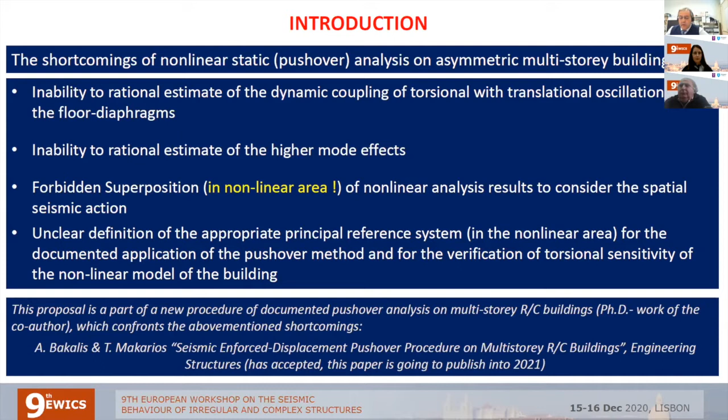Third, forbidden superposition in the nonlinear area to consider the spatial seismic action. Unclear definition of an appropriate principal reference system in the nonlinear area for the documented application of the pushover procedures. And inability to verify the torsional sensitivity of the nonlinear model of irregular in-plan buildings.

The basic concept of the proposal is that the capable near-collapse principal system of the building is defined as the appropriate nonlinear principal reference system. Seismic inelastic floor enforced displacements are applied on each floor diaphragm at the location of the vertical ideal principal axis. In this way, the building is driven directly to the near collapse state.

In other words, our methodology is a direct displacement-based procedure, avoiding various superpositions by using suitable floor-enforced displacement at each floor to fully consider the spatial seismic action via 16 pushovers, where the envelope of these 16 pushovers is considered as an estimation of the seismic demand. In other words, the seismic action is taken into account as suitable floor-enforced displacements.

Please change. I have a problem, I have a problem to change. Can't you share my desktop, please? Sorry to interrupt, you have full control of the presentation. If you just put the direction up and down. I can't go back. Okay, go back. I will ask to go back on your presentation. Like this, is it okay? Go back. Go back, please. Okay.

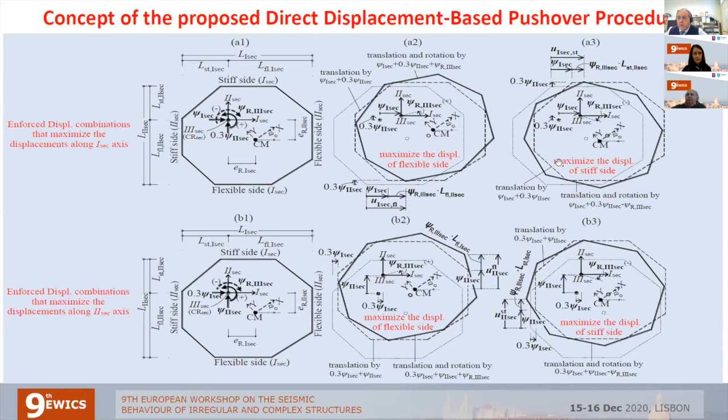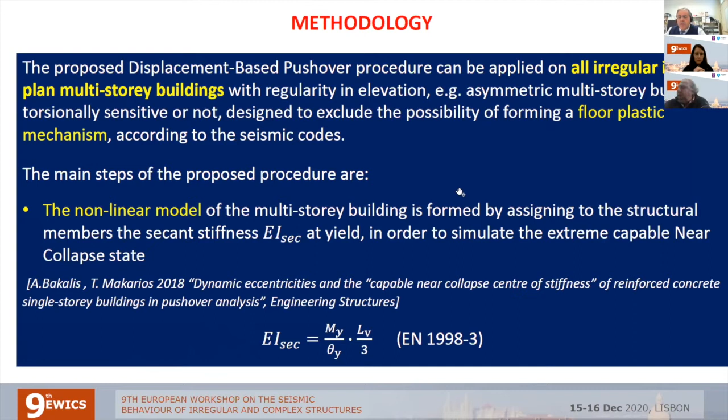Please go. The proposed displacement-based method: the main steps are that the nonlinear model of the multi-story building is formed by assigning to the structural members their secant stiffness at yield, in order to simulate the extreme capable near-collapse state according to Eurocode.

Calculation of the vertical fictitious elastic axis, namely the optimum torsional axis of the above-mentioned multi-story model of the building. Thus, the location of the capable near-collapse center of stiffness of the multi-story building is the point of the diaphragm at 80% of building height from its base, through which the optimum torsional axis of the building passes.

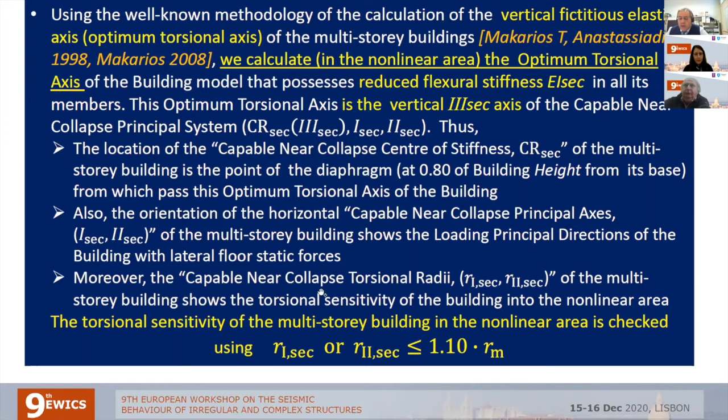Also, the orientation of the horizontal capable near-collapse principal axes 1 and 2 of the multi-story building show the loading principal directions of the building with lateral floor static forces. Moreover, the capable near-collapse torsion radii of the multi-story building show the torsional sensitivity of the building in the nonlinear area using this relation scheme.

In the picture, we can see that knowing the level, we can estimate the inelastic floor angular deformation at near collapse state for frame buildings, wall buildings, and dual buildings, and for each static eccentricity and torsional flexibility or stiff system.

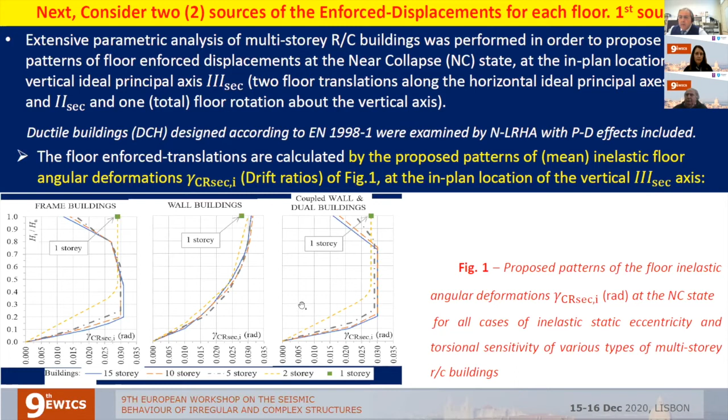By the same way, moreover, from figure 2, we can directly take the floor enforced rotation about an ideal vertical axis, for 3 building types: frame buildings, wall buildings, and dual buildings.

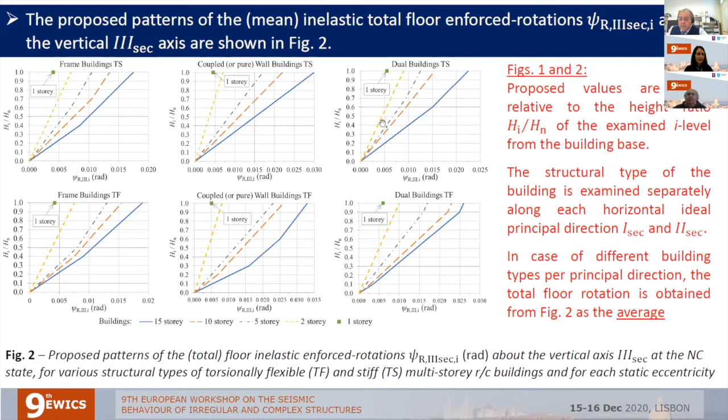According to the second source of the floor enforced displacement, we must carry out 2 sets of temporary pushover analysis, with the floor lateral forces acting on the vertical 3 axes along the horizontal axis 1 and 2.

In the first set, the lateral floor forces follow the uncoupled fundamental translational mode shape. In the second set, 80% of the base shear is distributed as in the first set, and the remaining 20% of the base shear is located as a concentrated lateral force at the top of the building.

Note that we consider 2 signs, positive and negative, of the above mentioned loading vectors, thus 8 temporary pushover analyses are performed. Here, P-delta effects are included, and the target displacement of the top of the 3 axes is calculated by table 1.

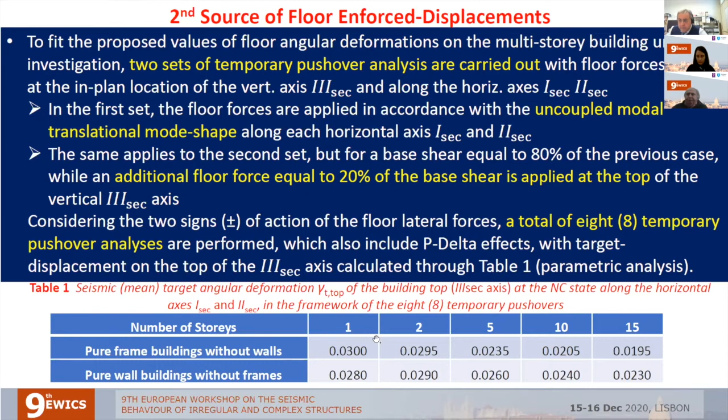The final envelope of the floor angular deformation is taken from the envelope of the 2 sets of temporary pushovers and from the proposed values of figures 1 and 2 by parametric analysis.

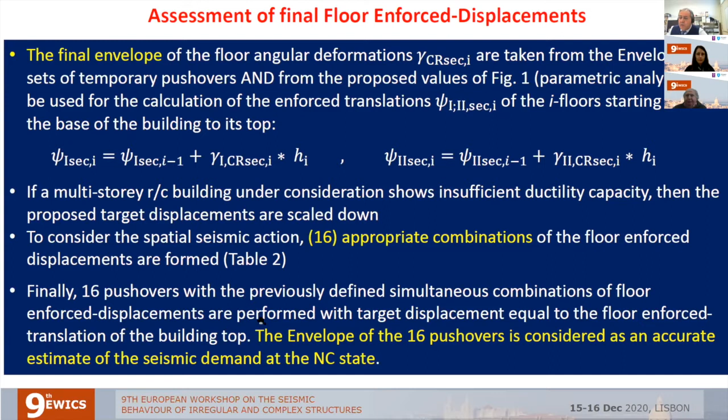To consider the spatial seismic action, 16 appropriate combinations of the floor enforced displacements are formed, where we must take their envelope in the seismic demand at the near collapse state.

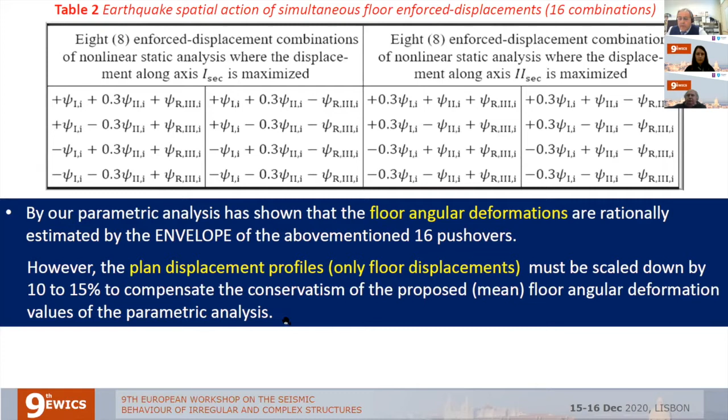Afterwards, all the above mentioned are true with very good accuracy at the near collapse state of the building. For the other seismic performance levels, the present methodology is scaled down according to this guidance.

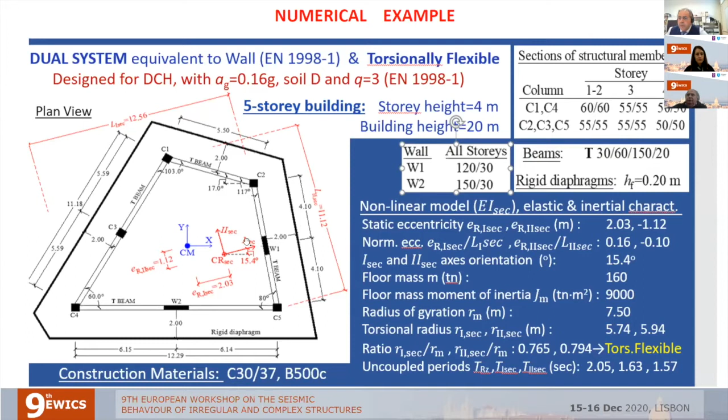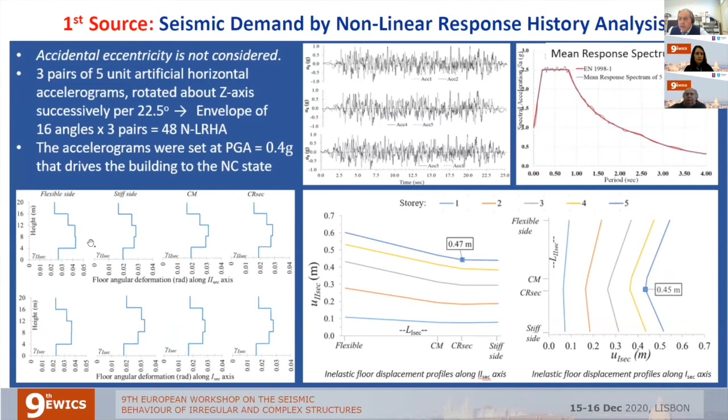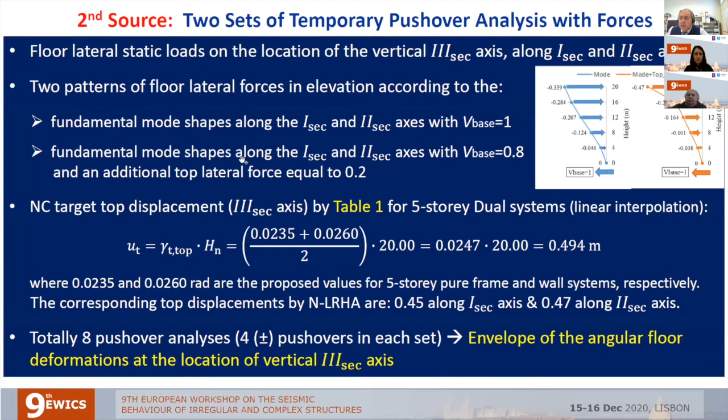By the first source, by nonlinear response history analysis, namely figures 1 and 2, we get the angular deformation in elevation. By the 2 sets of temporary pushover analysis, we get the deformation in elevation, and in the final 16 pushovers with simultaneous combination of enforced displacement.

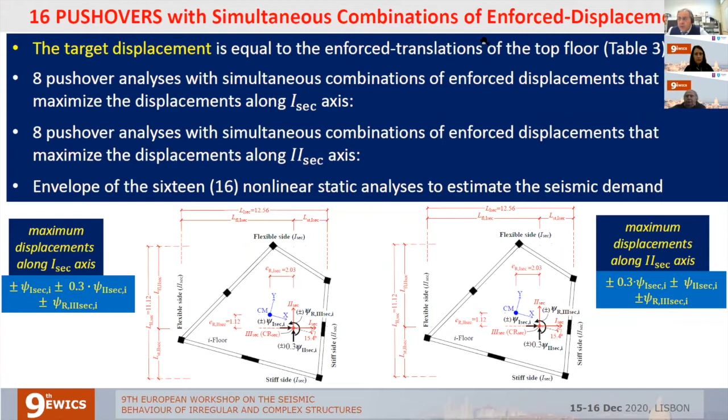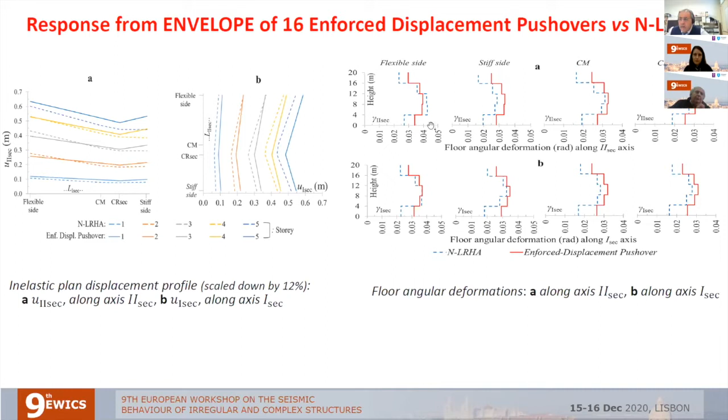Also, the floor angular deformation along axis 2 and along axis 1, giving very good accuracy.

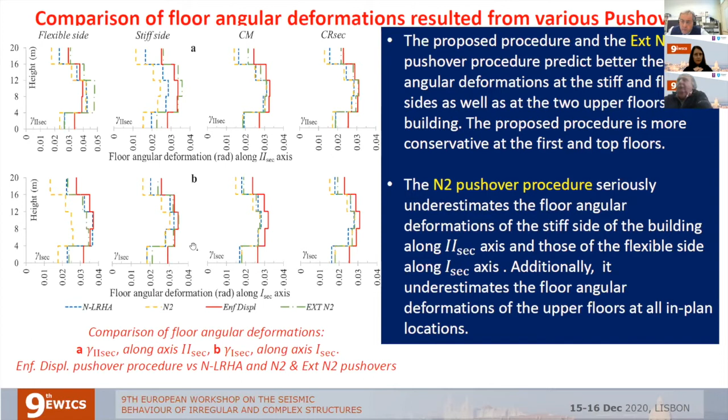Superposition is not used for spatial seismic action in the present methodology. The floor inelastic torsion is estimated with very good accuracy. The new procedure is very simple for all engineers.

The basic key is the definition of the capable near collapse principal system, that is the fictitious elastic system of a multi-story building at the near collapse state.

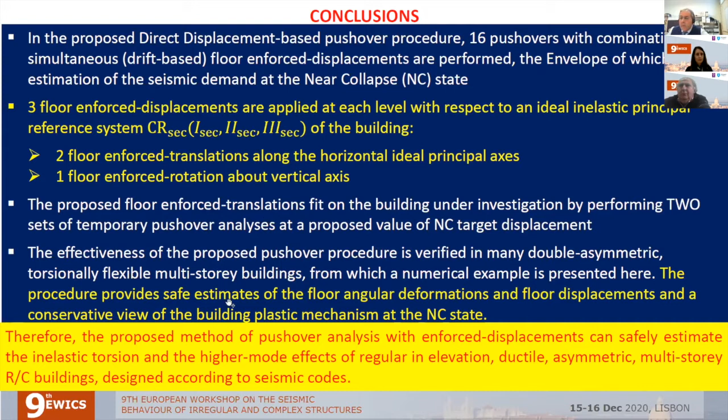I don't see any request. Yes, there's no questions. There are no questions, so you confirm me there are no questions. So I make one question, but a very short one.

Do you plan to check your method also for torsionally stiff systems? Because you checked for torsionally flexible systems, but do you plan to do it also for torsionally stiff and very torsionally stiff systems, such as those having shear walls at the perimeter.

Thank you for your question. Yes, yes, we are checking all types of buildings at torsional flexibility and torsional stiffness. Thanks.

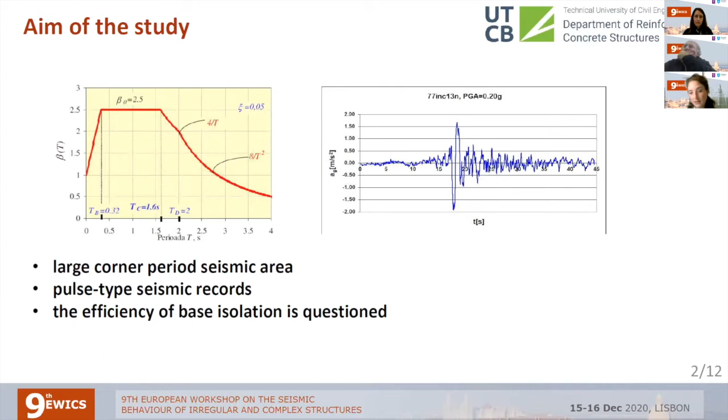This affects, especially in such regions with high corner periods, flexible structures. The idea was to see under these special seismic conditions if base isolation is an appropriate way of dealing with the seismic action, especially for plan and elevation irregular structures. So we chose a hospital building due to the fact that especially for hospital buildings, we expect and want to have immediate occupancy. We want the hospital to remain operational after a strong seismic event.

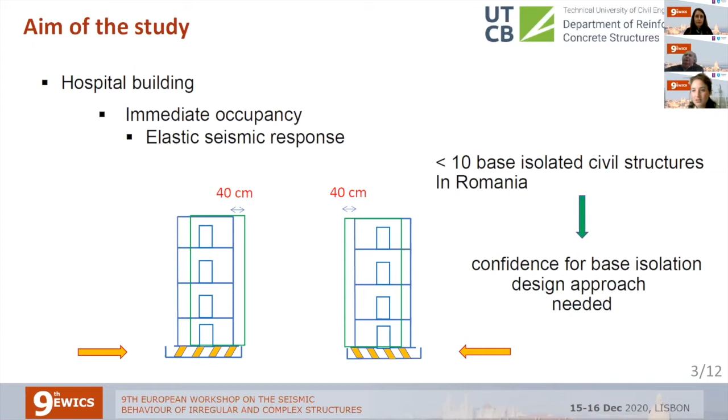Under the seismic conditions of the Bucharest area, we have displacement amounts of 40 centimeters. If we consider that for pushover analysis, we are requested by the seismic codes to reach a displacement capacity of 1.5 times this value, it comes to 60 centimeters, which is a lot. On the other hand, base isolation in Romania is at its start for civil structures. It was used quite largely for bridges, but not for civil structures. Just a few cultural and historical monuments were considered to be retrofitted by this method till now, so the confidence from practical engineers for this method needs a little more help.

We used this model to check the behavior of the structure through ambient vibration measuring. So we have a 5-story frame structure which is plan irregular and elevation irregular just a little bit, let's say at the border of the National Seismic Code. It has a setback from the ground floor to the upper floors, but since this setback is about 30% and affects only one floor, we decided not to take into account elevation irregularity and not to drop the behavior factor according to the seismic code.

This is how the structure was designed, and we checked this assumption by pushover analysis.

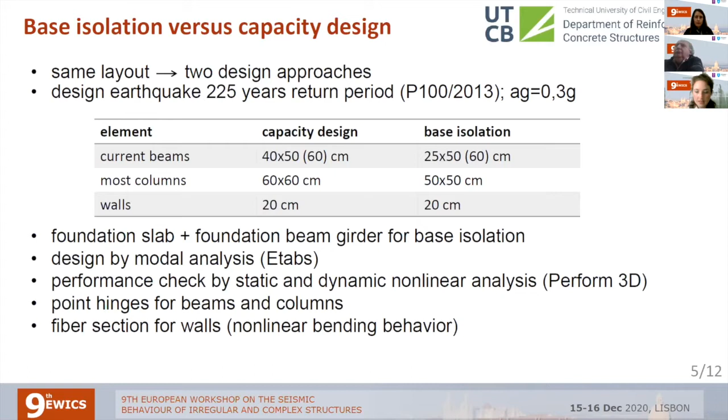Point hinges for beams and columns and fiber sections for walls were taken into account. The isolators considered are, let's say, the state of the art at this point—double curved friction pendulums. The behavior of those pendulums is given by such a diagram.

This diagram gives the relation between force and displacement. They were designed for 64 centimeters displacement capacity, considering the Eurocode 8 considerations, in order to have a bit of comparison with other seismic areas where such pendulums are used. The Romanian National Code doesn't provide this maximum earthquake because we have a lower return period.

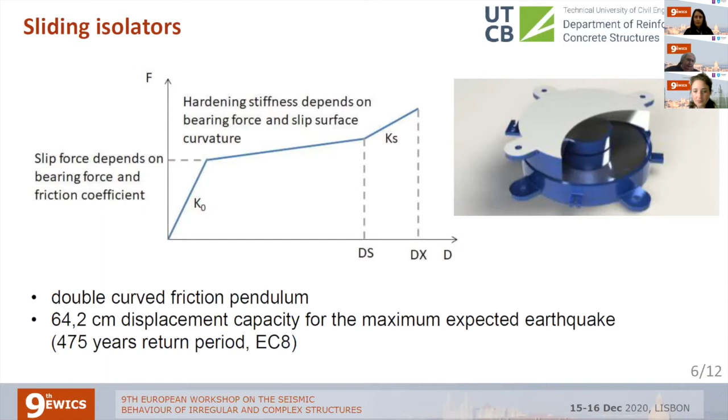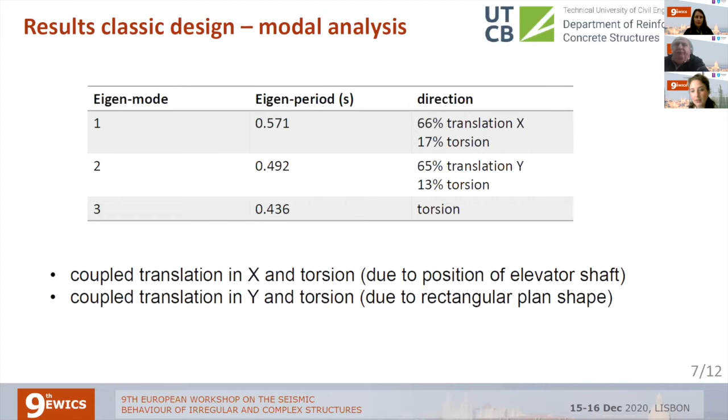Okay, those are the eigenmodes for the structure. As you can see, for the first two eigenmodes we have a coupling between translation and torsion in the x direction, the short direction of the structure. This coupling is considered to be explained by the position of the elevator shaft, because it's located at one edge, one side of the structure. In the y direction, the coupling is probably due to the rectangular shape of the structure.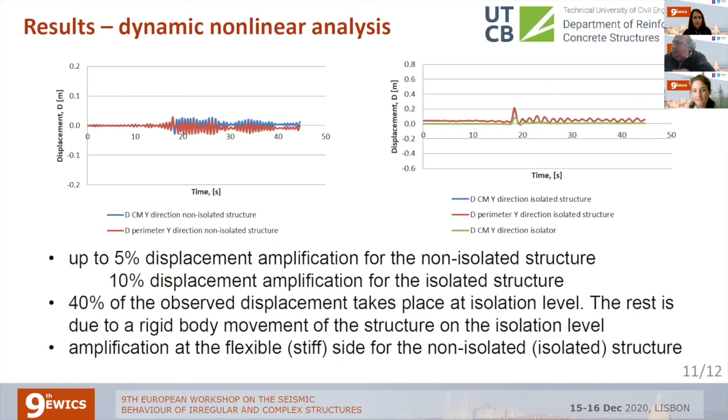Some main conclusions regarding this study. First of all, base isolation doesn't correct plan irregularity, but it neutralizes its effects by concentrating the deformations at isolation level, or by giving a rigid body movement supplementary to this isolation level deformation. Both of them give us no damage, so we come forward to our goal to have operational buildings after a strong seismic event.

One last explanation would be the fact that by base isolation, a reduction of the maximum seismic force that acts on our structure of 7 was obtained. During design, a behavior factor of 6.75 was considered, so we may say both attempts give us the same reduction in terms of seismic forces. The major difference is that for the non-isolated structure, the seismic forces which remain to be taken over by the structure produce damage, and for the isolated one, they do not.

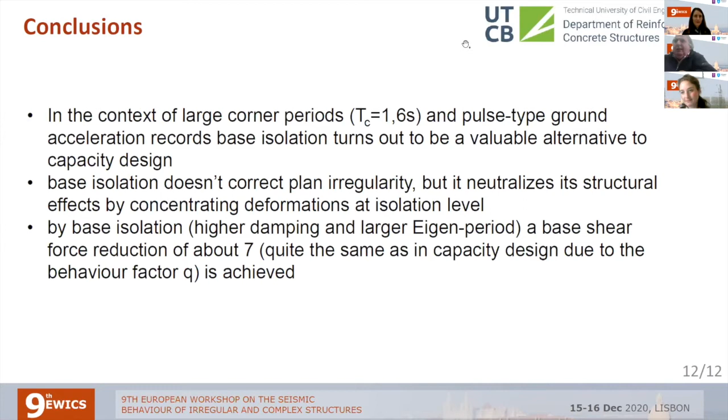Third paper in this session is entitled Seismic Capacity of Eurocode 8 Compliant RC Frames with Irregular Vertical Distribution of Stiffness. The paper will be presented by Francesca Barbagallo.

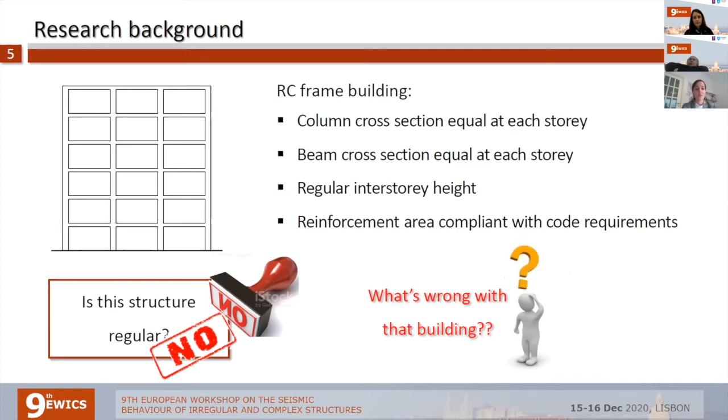So to understand what's wrong with that building, we looked at seismic codes and found that basically they all share the same fundamental idea: lateral stiffness has to change gradually from story to the upper one, and in case of irregular structures, penalties are introduced in design.

Eurocode 8 states that lateral stiffness of a regular structure must be constant along the height, or at most it must reduce gradually from base to top, while the Italian Seismic Code quantifies the limit of variation: for regular structures, the lateral stiffness must not decrease more than 30% or increase more than 10% from a story to the upper one.

So this is the reason why that building is not regular: the deep foundation beam increases the lateral stiffness of the first story more than 50% compared to the second story.

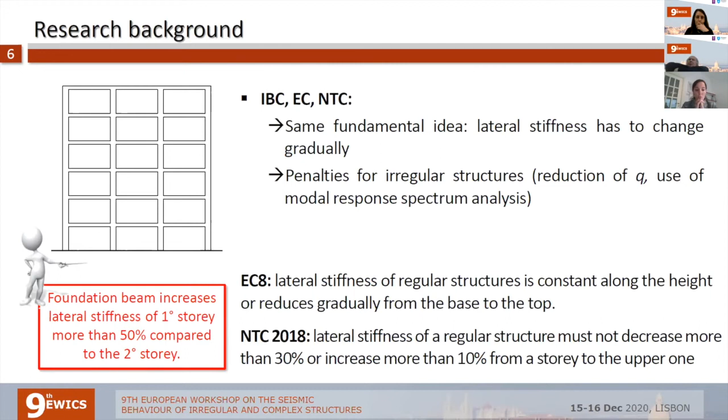The prescriptions of the code come from different studies. The first studies date back to the 1960s and 1990s, and they were mainly focused on understanding if irregular structures could be assessed by lateral force analysis or if response spectrum modal analysis was needed. But they basically used shear-type frames, so very simple numerical models.

These studies developed also in the 21st century, but they mainly moved the focus from the linear to the nonlinear range of behavior, trying to understand the effectiveness of nonlinear static procedures in evaluating the response of irregular structures. But they were not actually interested in evaluating the real impact of irregularity on the structural response.

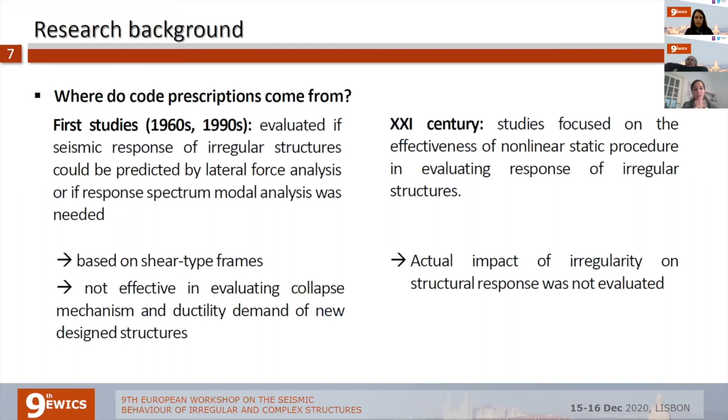Moving from this motivation, our methodology started from collecting a set of RC framed structures, including regular and irregular buildings, which were designed following seismic code prescriptions and assessed by nonlinear static analysis. The goal was to evaluate if and how much the seismic performance of the structures could be influenced by vertical irregularity.

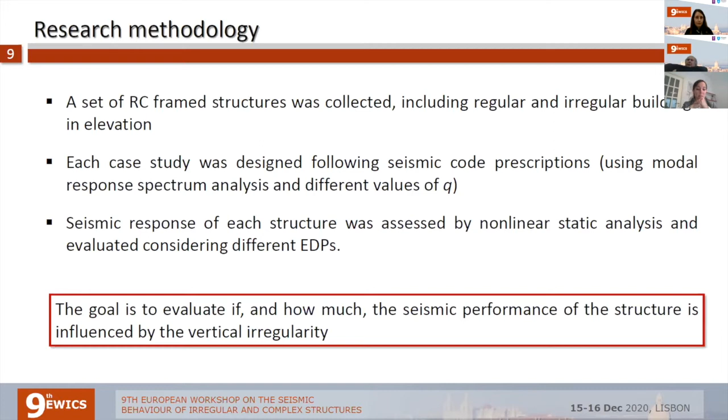The design case study frames shared the same geometrical features and included columns oriented with strong and weak axes, deep beams and flat beams, and different entities of gravity loads resting on beams.

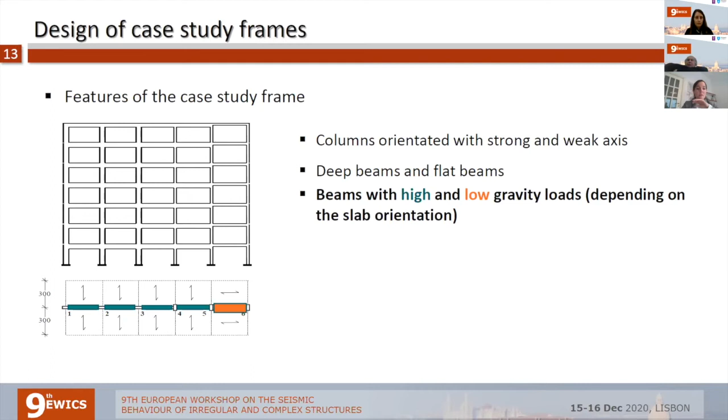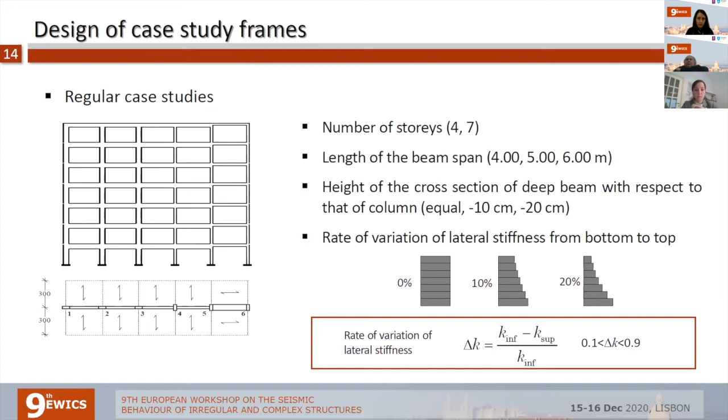To extend the number of case studies, we varied the number of stories, the length of the beam span, and the height of the cross sections of deep beams. The regular structures were obtained by considering a rate of variation of lateral stiffness from bottom to top equal to 0%, 10%, or 20%, where the rate of variation was evaluated as the difference of stiffness of the lower frame and the top frame divided by the lateral stiffness of the lower frame.

From the regular case studies, the irregular ones were derived by changing the rate of variation of lateral stiffness, and we obtained 4 types of irregular case studies: A, where the stiffness reduced from first to second story; B, where the stiffness reduced from the bottom to the top part of the building; C, where the stiffness reduced at an intermediate story; and W, where the stiffness increased from the first to the second story.

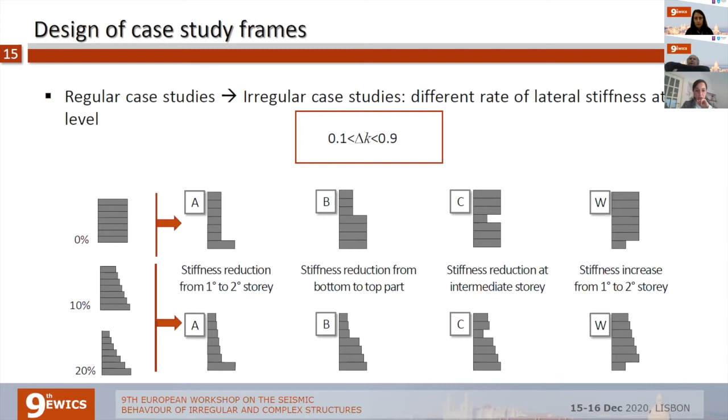All the regular and irregular case studies were designed by modal response spectrum analysis according to the capacity design principles and in compliance with the requirements for reinforcement.

Each frame was designed assuming 4 values of the behavior factor Q to attain high and low ductility structures, and we attained 54 regular frames and 810 irregular frames.

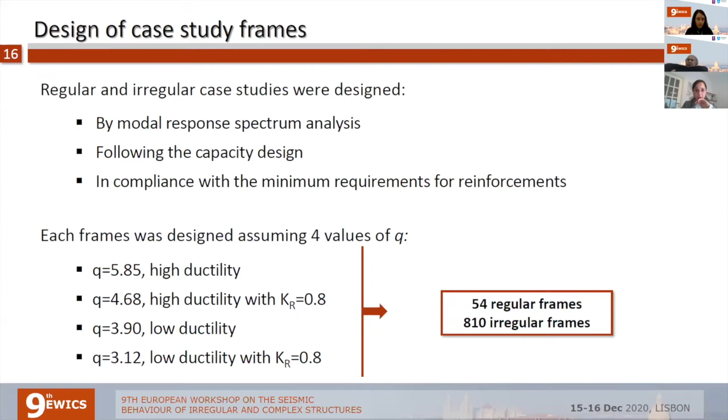All the case study frames were modeled as nonlinear, bidimensional numerical models with beam elements using concentrated elastic perfectly plastic hinges, and they were assessed by nonlinear static analysis. The displacement demand was evaluated and associated to the corresponding peak ground acceleration using the N2 method.

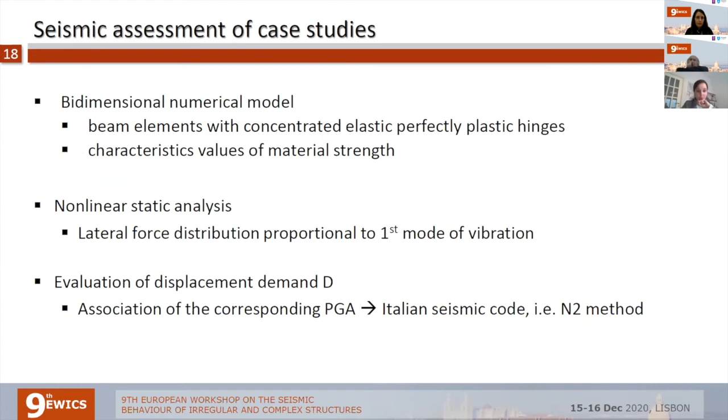The seismic performance of the structures was determined in terms of shear failure, which actually didn't occur in our structures, so we will not use it in the following. We also evaluated it in terms of plastic rotation of member ends.

To this end, we evaluated the plastic rotation capacity from the chord rotation, evaluated according to the equation provided by Eurocode 8, and compared it with the plastic rotation demand determined by pushover analysis. The ratio of the plastic rotation demand to capacity gave rise to the damage parameter D, which was equal to 1 when the significant damage limit state was attained.

We adopted 2 response parameters. The first one was the average damage attained at the significant damage limit state for beams and columns, while the second one was the PGA that corresponded to the attainment of the significant damage limit state in beams and columns.

Here I'll show the results for case A, with 7 stories designed with behavior factor 5.85. On the x-axis we have the rate of variation of lateral stiffness, and on the y-axis we have the average damage in columns and beams.

We can see that the average damage is concentrated in beams rather than in columns. The trend line shows that the damage in columns tends to decrease until a rate of variation of delta K lower than 40%, and the damage attained in irregular structures is quite similar to that attained in regular structures.

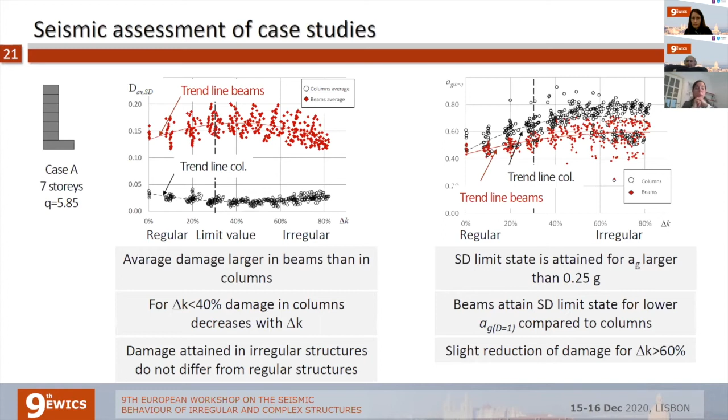We have also plotted the peak ground acceleration corresponding to the attainment of the significant damage limit state in columns and beams. Most cases were able to attain the significant damage limit state for peak ground acceleration larger than the reference value. Beams, however, attained the significant damage limit state at a lower peak ground acceleration than columns, and there was also a slight reduction of damage for delta K larger than 60%.

The trend lines were also plotted for all the case studies, considering all possible values of the behavior factors adopted and considering the minimum value of peak ground acceleration between columns and beams, corresponding to the attainment of the significant damage limit state. We plotted these trend lines for the 7-story and 4-story case study frames.

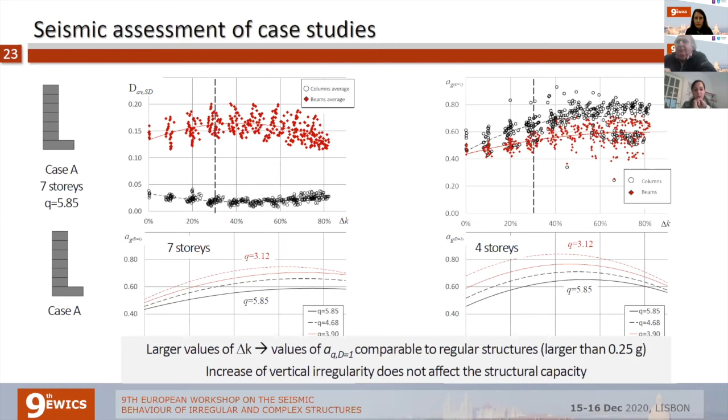We can see that the increase of vertical irregularity does not affect the structural capacity, because regardless of the entity of delta K, the structures are able to attain the significant damage limit state with peak ground acceleration larger than the reference value.

Moving on to case B, the results are the same as those obtained for case A: average damage concentrated in beams, peak ground acceleration corresponding to the significant damage limit state larger than the reference value, and the trend lines show that the capacity of the structure is not affected by the increase of vertical irregularity.

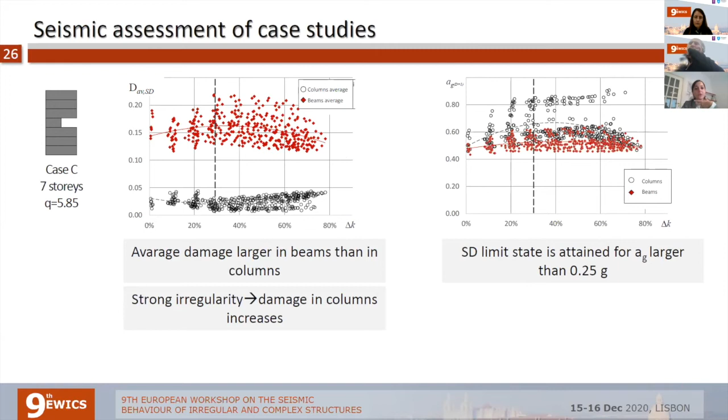Moving on to case C, the results are consistent with case A and case B. The only difference is that in very strong irregularity cases, damage in columns becomes not negligible. However, the peak ground acceleration corresponding to the significant damage limit state is once again larger than the reference value, and for the 7-story case studies the increase of vertical irregularity did not affect the structural capacity.

A slightly different result was obtained with the 4-story case, where the seismic capacity reduced slightly with larger irregularity, but it was always well verified.

A different result was obtained in case of frames W, where I remind you the stiffness increases rather than decreases from the first to the second story. Here the damage is concentrated in beams but reduces with the rate of stiffness variation almost linearly, while the damage in columns increases with the variation of lateral stiffness.

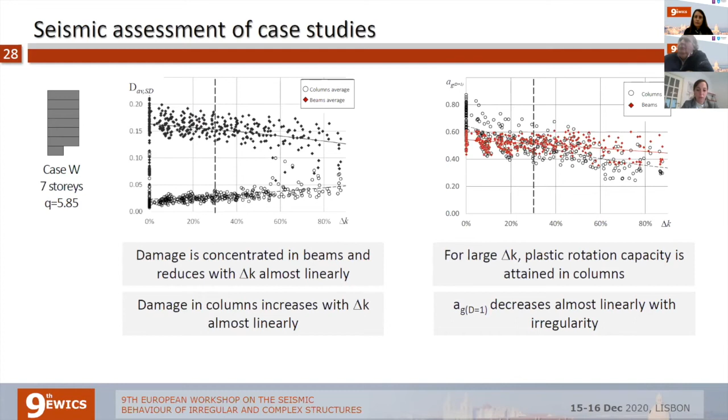This means that for large values of delta K, which means for irregular structures, the plastic rotation capacity is mainly attained in columns, and the peak ground acceleration corresponding to the significant damage limit state decreases almost linearly with irregularity. The trend lines confirm this result, showing that vertical irregularity in this case has affected the structural capacity, so maybe the reduction of the behavior factor adopted here was not working very well.

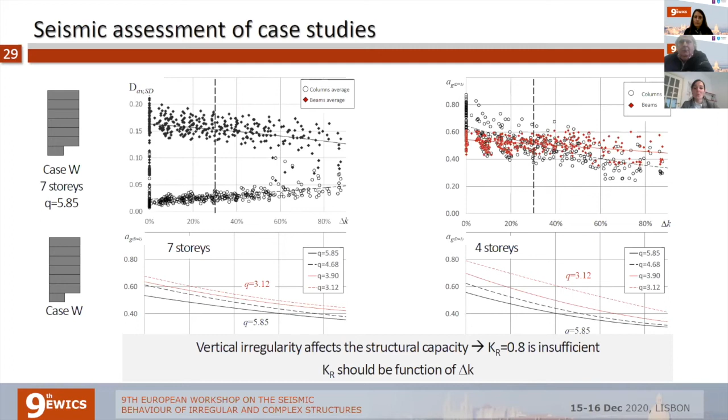In conclusion, for case A, B, or C, the seismic capacity was basically independent from the variation of stiffness along the height, meaning the design criteria provided by codes are able to ensure good seismic capacity even in case of abrupt reduction of lateral stiffness. So it seems quite restrictive to classify structures with stiffness reduction as irregular, even though avoiding abrupt reduction is always a good suggestion.

Instead, it's important to note that the increase of lateral stiffness along the height had a strong influence on the seismic response of structures, because it led to a larger concentration of damage and lower values of peak ground acceleration leading to the significant damage limit state. So maybe in this case the reduction of the behavior factor should be evaluated and related to the rate of variation of lateral stiffness.

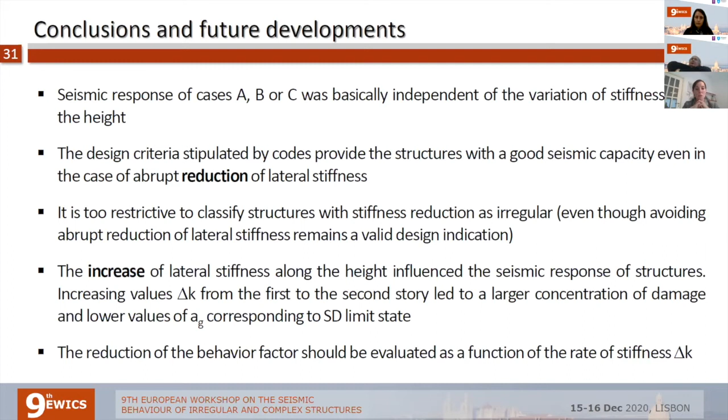Of course, these results are first preliminary investigations, and further studies are in progress using more realistic numerical models with distributed plasticity members and running nonlinear dynamic analysis, with the goal to verify if the results here presented are confirmed, and in case, how much.

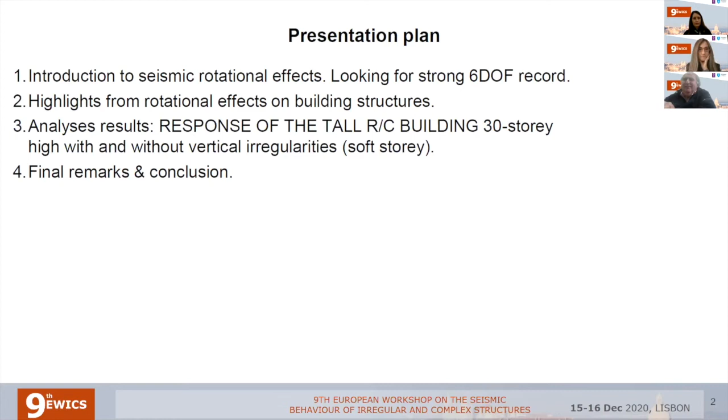Good afternoon. Today I'd like to show you our latest results on the rotational research that we do at Opole University of Technology. Firstly, I'll make some introduction to seismic rotational effects and our search for strong 6DOF records. I'll present some highlights from our earlier rotational research on rotational effects on building structures, and show our latest results on the response of a tall reinforced concrete building, with and without vertical irregularities in the sense of a soft story. There will also be remarks and conclusions.

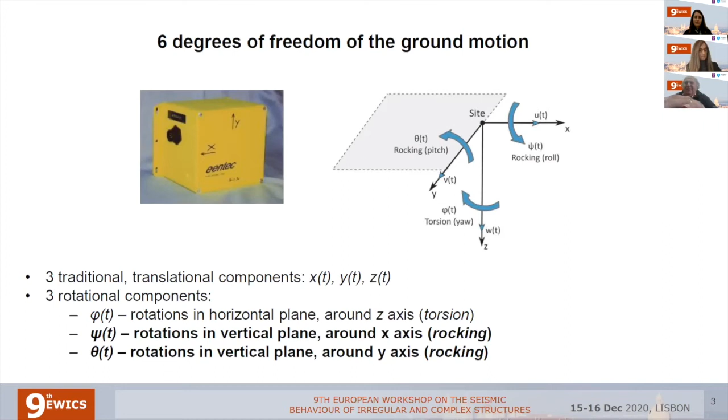To begin with, I have to say something about rotational ground motion. Traditionally in seismic engineering, we mostly analyze structures induced by two horizontal seismic components. Sometimes we also use the vertical component, like for bridges, but we also know that ground motion includes rotational components. So we have one rotation about the vertical axis, which introduces torsion, and two rotations about the horizontal axis, which introduce additional rocking in the building. I will focus on the latter two.

In our research, the key problem is how the rotational component, rocking of an earthquake, interacts with the horizontal translational component in the same plane. If you have a translational-rotational 6DOF record, with the plus/minus signs of respective components properly assigned during the recording of the earthquake, we can perform time history analysis using the non-classical formulation of the equation of motion. On the left side we have mass, damping and stiffness matrices, and on the right side we have ground translational acceleration connected with the influence vector filled with ones, plus additional ground rotational acceleration with an influence vector connected with the elevations of the respective degrees of freedom.

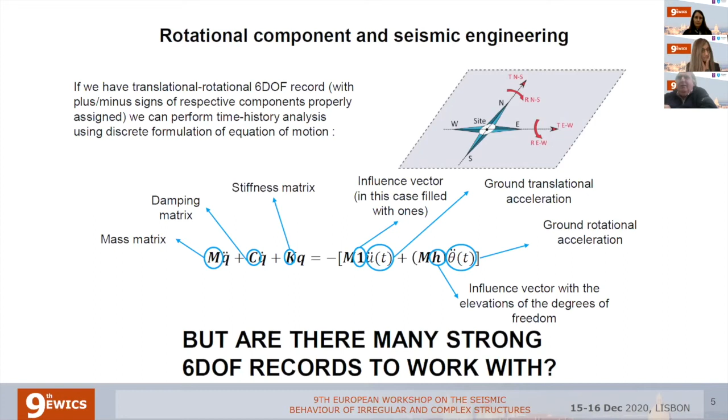But first, before we conduct any time history analysis, we have to answer whether there are many strong 6DOF records to actually work with. We have done research on that matter, and found that the earliest strong 6DOF record can be attributed to Nigbor, who in 1994 acquired ground rotations from a strong distant explosion using 1 kiloton of explosives.

Another strong ground rocking record was acquired by Takeo, but in that case we are not so sure about the correct plus minus signs of the respective components assigned. And we have also indirectly recorded rotations by Grazier.

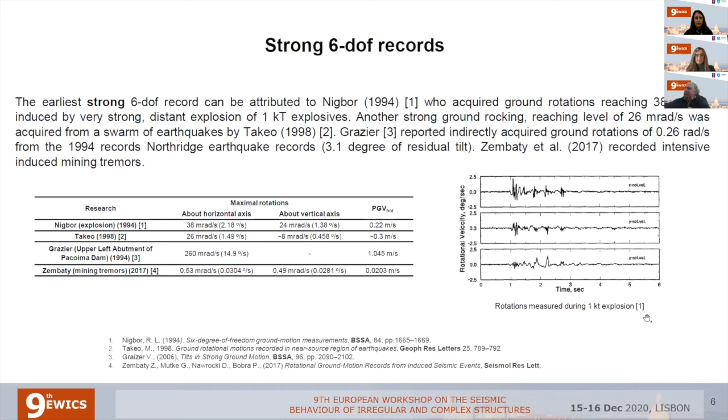Recently, in 2017, Zembaty and others recorded intensive induced mining tremors. At the beginning of our research, we used these induced mining tremor records to analyze the effect on a 160 meter reinforced concrete industrial chimney, and we found that this rocking component can contribute up to 65% of the total response of the RC chimney. Also, if we change the signs of the rocking component, it resulted in up to 120% change in the overall seismic response. So the correct sign convention during the recording of the earthquake is really important.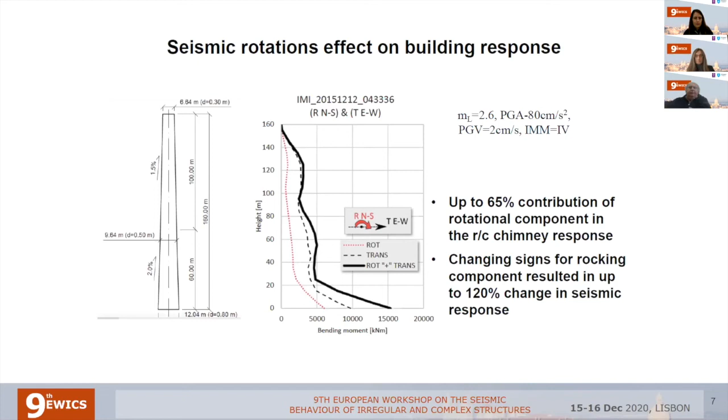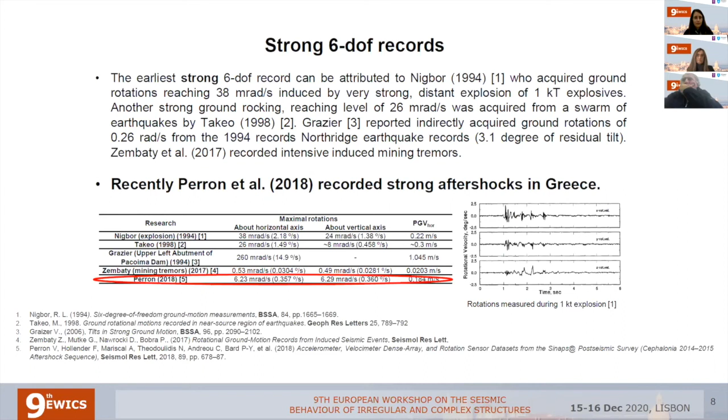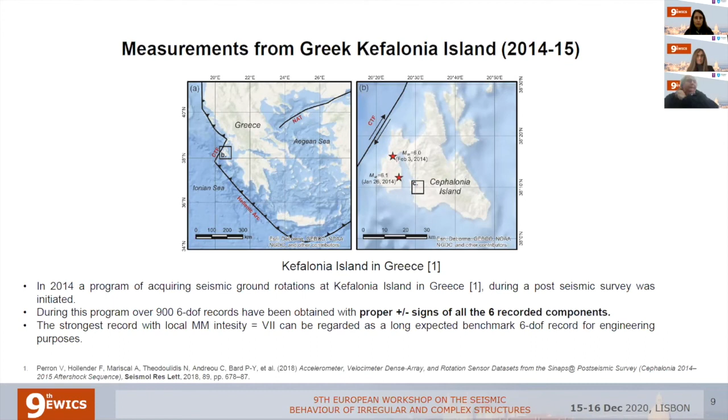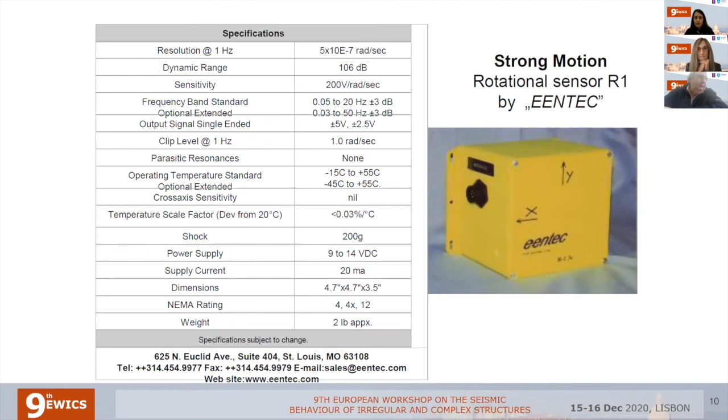This previous recording was for induced mining tremors or explosions, but we still didn't have records for strong or more intensive earthquakes. Luckily, recently Perron and others in 2018 recorded strong aftershocks in Greece. They started in 2014 a program for acquiring seismic ground rotation at Kefalonia Island in Greece during a post-seismic survey. They recorded over 900 records with proper set plus minus sign components for all 6 components of the ground motion. The most intensive record has modified Mercalli intensity 7, and in our opinion can be regarded as a long expected 6-dof record benchmark for engineering purposes. This record was recorded by the electrochemical rotational sensor R1 by EENTEC. Most of the known strong motion rotational records were recorded by this sensor for now.

So we took and analyzed the most intensive records. The most intensive record had magnitude 5 and peak ground acceleration over 4 meters per square second, with modified Mercalli intensity 7.

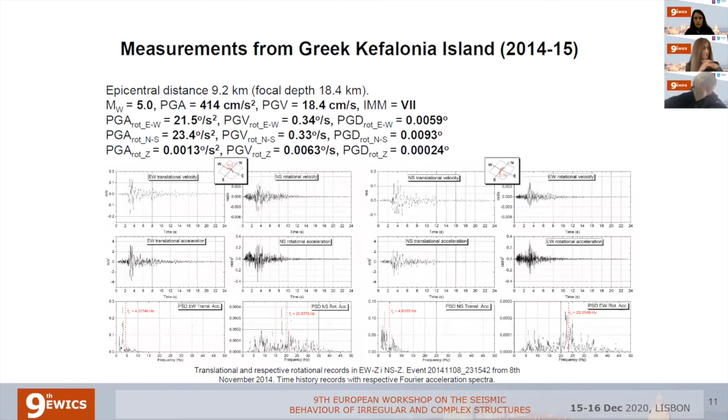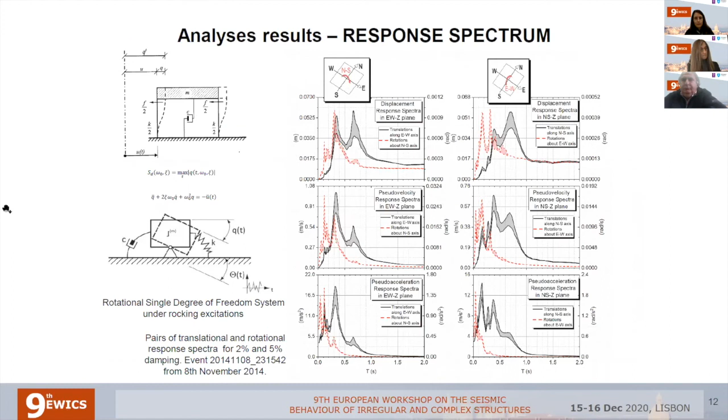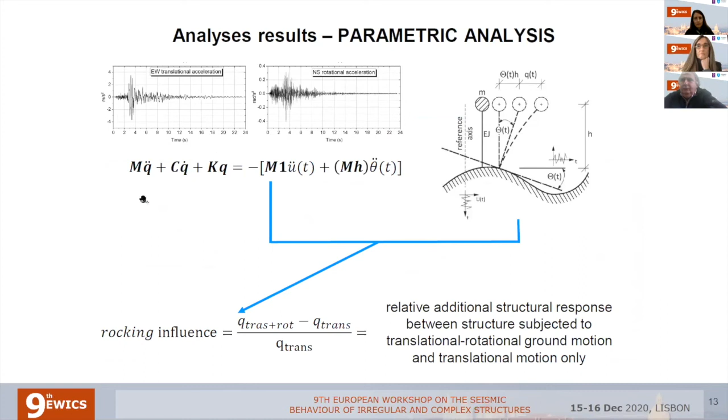Firstly, we calculated the response spectra for horizontal translational and rotational components. For the rotational component, we had to design a special rotational single degree of freedom system. Then we performed parametric analysis to check the rocking influence, which is the relative additional structural response between structures subjected to translational plus rotational ground motion versus translational motion only.

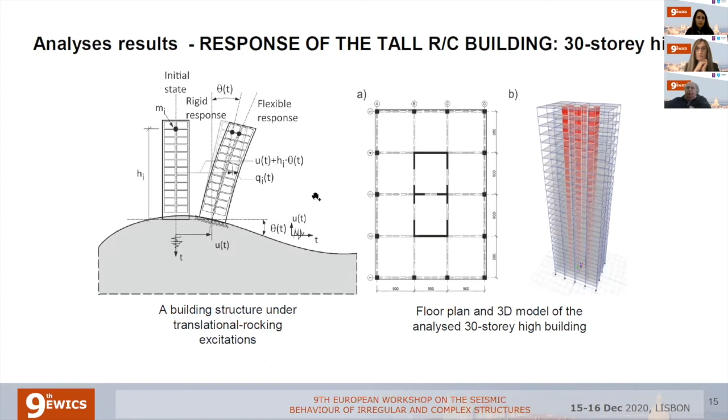So we later analyzed the response of a tall reinforced concrete building, 30 stories high, over 100 meters total height, regular in plane. For this selected record, we calculated the storey shears along the height, base shear, base overturning moment, and deflections. We found that the rotational component has over 15% influence on selected components of the response. For different motions analyzed, the total influence was also different, and could be larger than 20%.

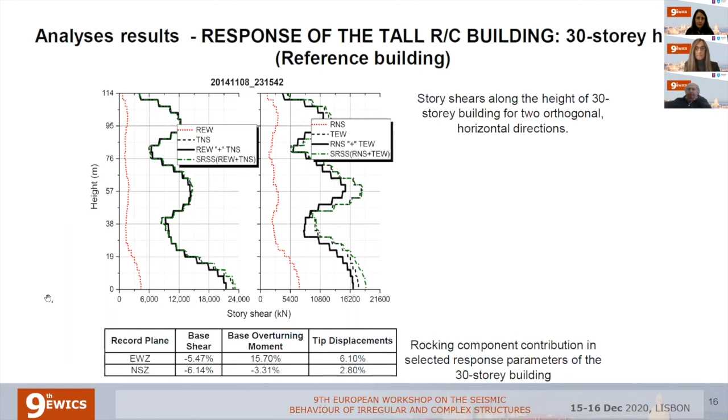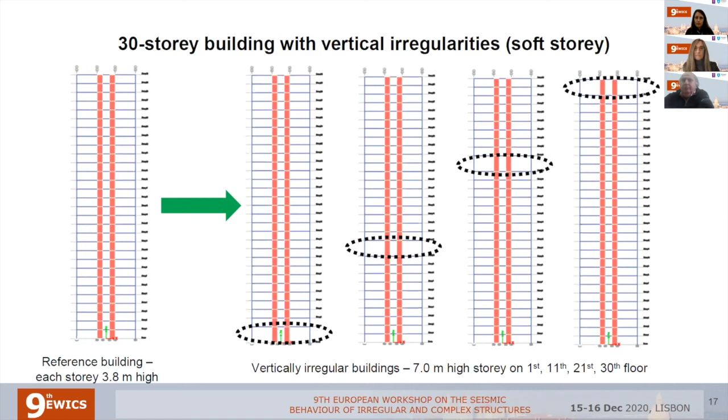To analyze the influence of vertical irregularities, we introduced a roving soft story by changing the height of the selected story. The reference building has 3.8 meter high stories, while the vertical irregular buildings have 7 meter high stories on the first, 11th, 21st, and 30th floor. Firstly, we performed modal analysis for the reference and vertical irregular buildings, and found that the change in mode vectors and natural periods is not very visible, with the change in natural periods less than 10% for the vertical irregular buildings.

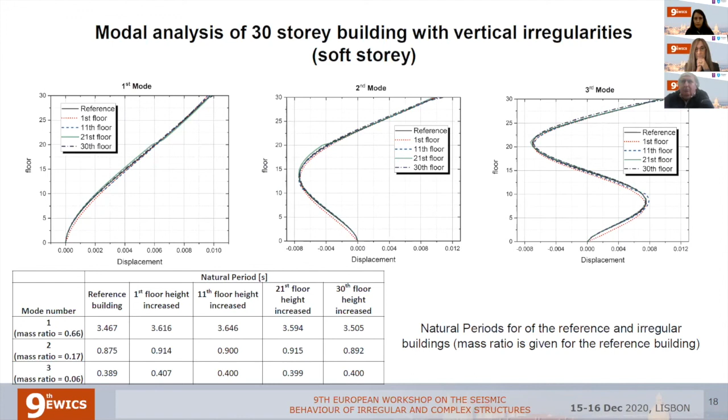Then we analyzed storey shear force, looking at the effect of the rotational component only, the translational component only, and the joint translational and rotational effects on storey shear forces. We can see that the irregularities cause a slight increase in storey shear force when analyzing buildings influenced by the rotational component.

This increase can be visible only in the higher part of the building. This cannot be seen if we analyze the building with the translational component, or when we analyze the building with the translation, when the building is influenced by translational and rotational components jointly.

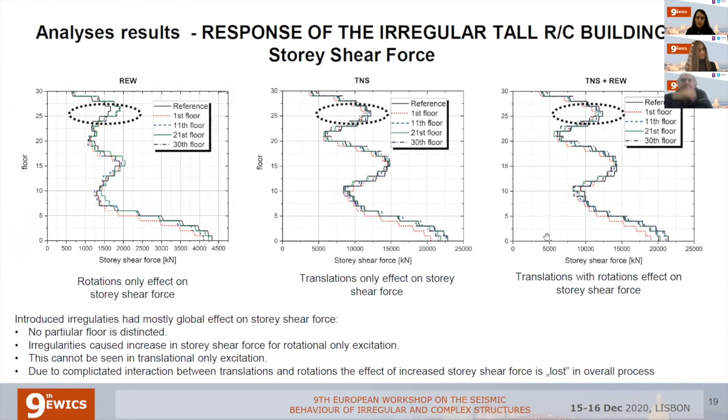Then we repeated the same procedure for analyzing the interstory drift. The conclusion can be the same. The rotational component increased the interstory drift at the higher parts, but didn't have any influence when the building was influenced only by the translational component, or when it was excited by translational and rotational components jointly.

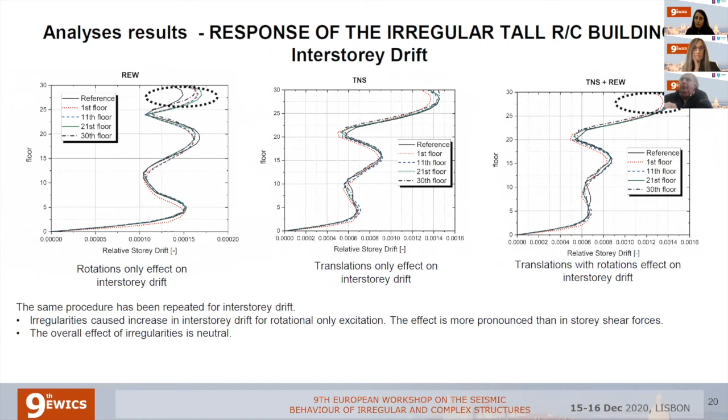Of course, in this case of this record, the rotations had small effects on the response of the building.

So we also checked what would be the effect of the rotations if we artificially increased their intensity. In this case, we multiplied the rotation effect by 5 times. And firstly, we assumed that we would have the most change in the interstory drift at the higher parts.

But after our analysis, we have seen that the change of the interstory drift at the high parts was still neutral, but we have some change in the lower parts of the building. So we can say that the interaction of rotational and translational excitations can give totally unexpected results.

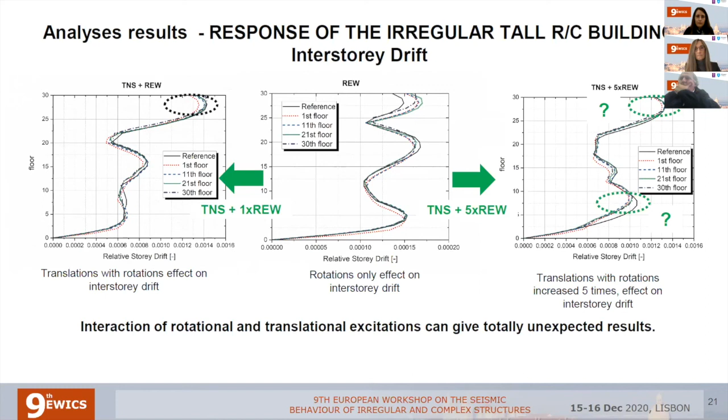So still more we have to analyze on bigger data sets, for example, more rotational translational records.

To sum up, we performed comprehensive analysis of the seismic signal, including response spectrum analysis in time and frequency domain, using intensive 6DOF records from the Kefalonia Island in Greece. A special displacement response spectrum was defined to study joint horizontal rocking effects on the seismic response.

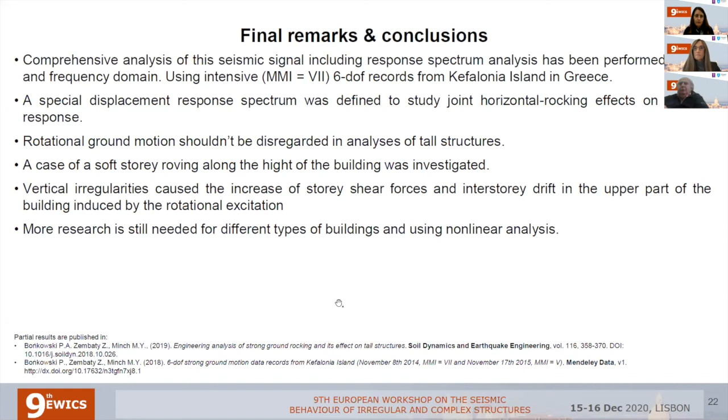As you can see, the rotational ground motions shouldn't be disregarded in the analysis of tall structures. We analyzed the case of the soft storey roving along the height of the building and the vertical irregularities caused the increase of storey shear force and interstory drift in the upper part of the building induced by the rotational excitations. But still, more research is needed for different types of buildings and using nonlinear analysis.